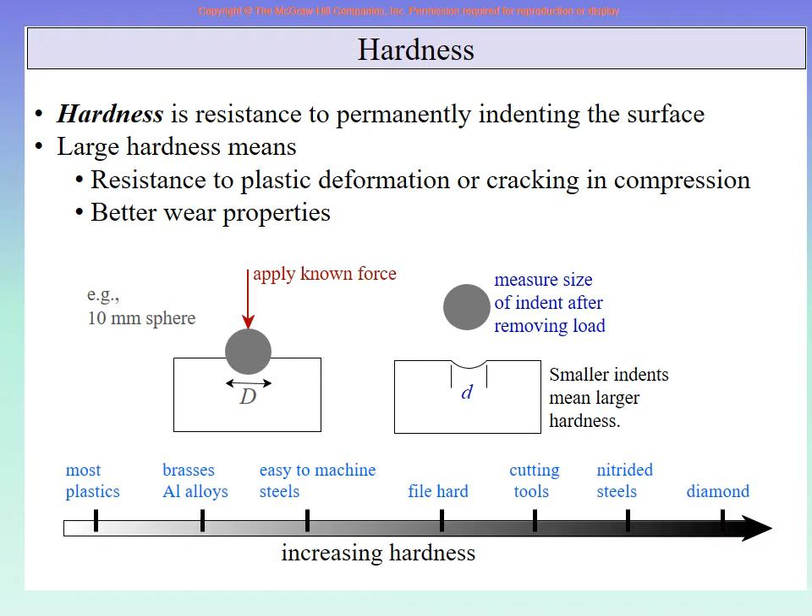Now we are showing you an actual machine. This is a Rockwell hardness testing machine, named after the engineer scientist who invented it. This is exactly the machine we have in our properties of materials lab; if you were doing labs this time, you would be using this machine.

This machine has a diamond type of indenter. We force it into the piece, it goes down and creates a shape, and the depth of that shape, combined with the known machine force, gives the hardness number directly.

There is a machine in the properties of materials lab which is an analog version of the same Rockwell hardness tester, where the reading comes with a needle and marks, while this one is digital. The reading is HR, Rockwell hardness, and there are scales A, B, C depending on the material.

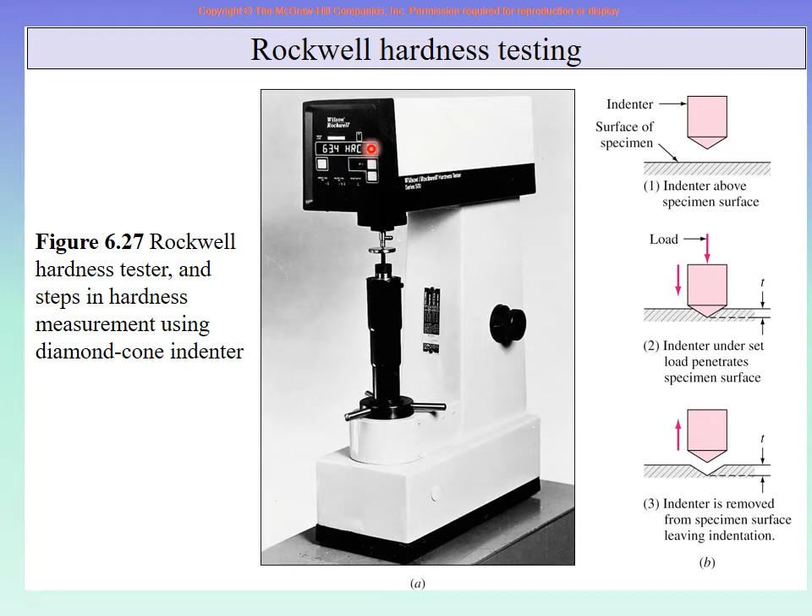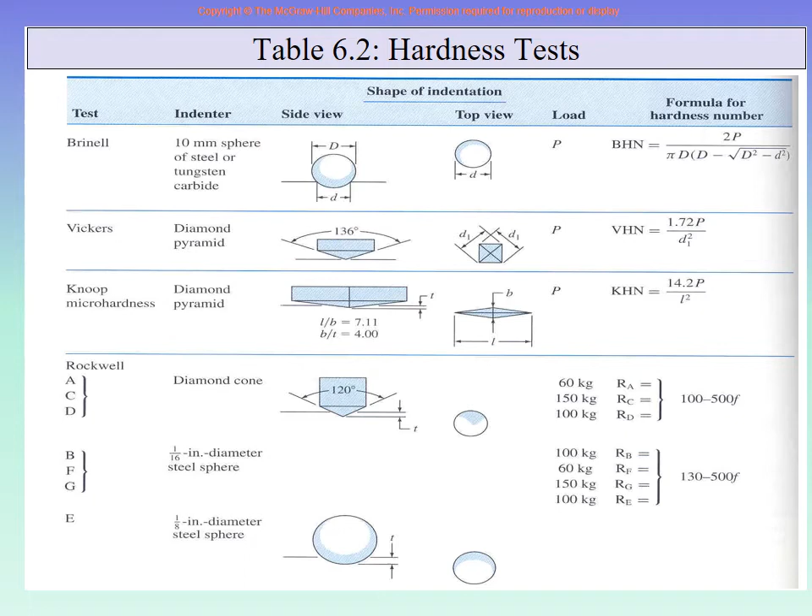So therefore you have to select a proper scale. For softer materials like aluminums and brasses, we use the B scale, and for harder materials like standard steels and so on, we go to the C scale in hardness.

So with this, we have finished the hardness part also. So now you see, as far as your labs are concerned, we have done all the 3 types of work that we needed to cover. You know the tensile testing machine or the universal testing machine, right? And after the stress strain diagram, you can find 6 different properties.

You know the impact testing machine now, the Charpy impact testing machine. You can find only impact toughness of the material. And you know the hardness testing machine, you can find only the hardness. So 6 properties from tensile testing. The properties are elastic modulus or Young's modulus, yield strength, ultimate strength, ductility, resilience and toughness.

Resilience and toughness are a little rough. All other four are very accurate. Then from the Charpy impact testing machine, the impact toughness of the material in joules, in energy units. And from the hardness machine like Rockwell hardness, the hardness of the material in Rockwell hardness numbers, right? So for all the labs that you want to do, now you have covered the material, right?